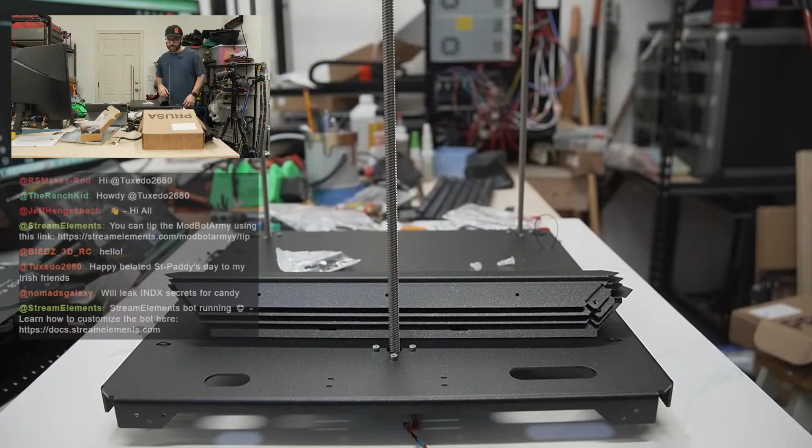So last week we finalized the teardown of the Mark 4S and started on the bottom frame here. We basically got the bottom panel and attached the spacers to the Z lead screws and installed these guys. I think the only thing I've done off stream— if we need to lube the bearings today, I did actually remember to print out the little nozzle piece, I just left it upstairs.

The last 24 hours have been kind of crazy. I've been editing a 32-minute review on the Centauri Carbon 2 that's coming out on Saturday, and I've also been printing a ton of Gridfinity stuff, trying to finally organize my chaotic life. It's actually been quite fun. I do print a lot, but a lot of the printing I do is for videos, so there's a lot of things I want to print that I don't get to because I need something artsy to show off detail. But now, for this, it's functional organization, which is kind of my jam.

So yeah, the one thing I did off stream was install these two printed pieces. They just popped into place. Then I used the included larger wrench to turn them 90 degrees and basically move the pegs so that they're under the sheet metal and can't pop these parts out again. Everything else we've done on stream. So Friday—ooh, that's exciting.

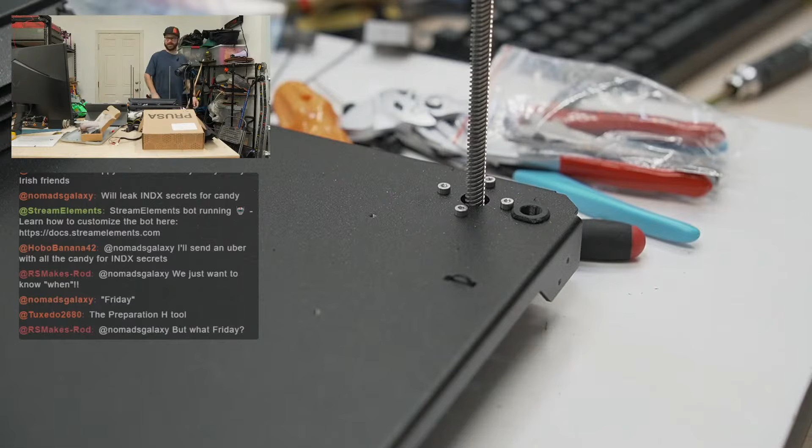The game plan with this guy initially wasn't really the game plan because I wanted to do INDX, but I wasn't sure what it was going to go on. I think that was before I knew I was doing the CORE One conversion. But now that I'm doing this, it makes a lot more sense to use this for INDX whenever kits and stuff are available.

All right, I did do a teeny tiny bit of the Preparation H tool, yeah. Do you use Fusion? A tiny bit. So we'll change to me real quick.

I have jumped through a lot of CAD software. When I first started playing around with 3D printing, it was like 123D Design, which wasn't good, but at the time it was free and enough for me to learn a little bit. Then I used Fusion, and my CAD skills are quite novice—beginner plus, maybe intermediate would be a step up. I can CAD some functional stuff and modify parts, but I don't want to overcredit myself. I played around with Fusion for a couple of years when I had a student license, then got a hobbyist license for a bit. Then once they started changing up their licensing, however many years ago that was, I jumped over to Onshape.

I used Onshape for a little bit, and now for the last 3 years or so, my daily driver is Shapr3D, which is what we pretty much always use on stream to reference CAD. Shapr3D is paid, and it's more expensive than I thought. I think I thought I was paying like $150 a year, and I'm pretty sure we checked on stream a while back and that wasn't the case. I'm actually curious to see if I go into Shapr3D.

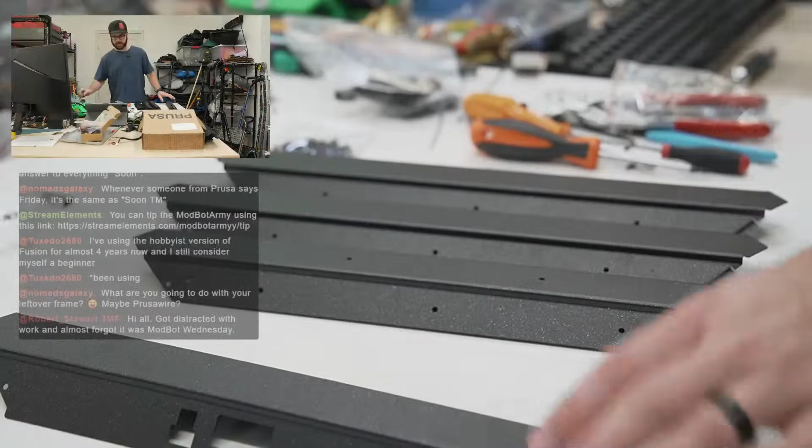As far as parts go, there are 4 parts here. 2 of them are different, 2 of them are the same. We've got one with these cutouts right here, one with these 2 holes, you can't really see those - there you go, 2 holes right here. And then 2 of them that don't have holes at the top, and they're basically, let's see, 2, 4, 6, 8, 10 holes, 2 columns, 5 rows. That's great.

Hey, Robert. I don't think I said hi to Rod. If I didn't, did I say hi to you? I don't know if I did, RS. If not, hi, I apologize. I read your name and then got distracted.

So I've got all the parts. We've got these, so we can move on to assembling these now.

It says be careful when handling sharp metal. Knowing myself, I will cut myself because I always tend to hurt myself. I'm a professional at accidentally... oh, I did. Cool. Thank you. So many times my brain can think faster than I can speak things. Contrary to what you might believe, considering I know I talk very fast, sometimes I'm like, did I say that or just think that I said it?

Okay, so orientation wise, it looks like we want the little cutouts facing us on the bottom. And the side has this sort of lip that comes down a little bit, and that should be facing upwards. So it looks like this is going like this, but as far as how it overlaps, let's see - place the front profile according to the picture, place one of the universal profiles on the left side.

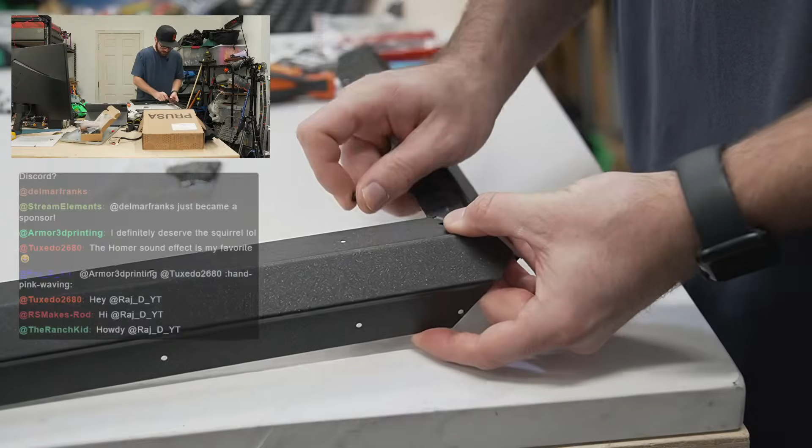But this review video I'm working on, my review videos keep getting longer and longer, and I'm not actually a fan of it because I'm a squirrel, I don't like incredibly long videos, but I also have this issue of thinking information is going to be quite... wait, hold on.

Align the holes, join the parts together.

A lot of the information I cover, I think, is important, and that's why I cover it. So I don't want to just make a video shorter by cutting out information. It's been this weird balance, and because printers are getting so much more involved and complicated, and a lot of them are having multicolor add-ons, I could do a full video on just the multicolor add-on. So it's like combining 2 videos into one.

Anyways, I've been dedicating my free time to getting this video out, because I cut back on videos to just every other week now, instead of every week for years, then 2 on, 1 off. But with 2 kids and trying to juggle everything with LightBurn, Millmage, and YouTube, I can't.

Especially again, the videos are so long now it's almost like I'm making 2 videos out of one. So I'm working on putting together some topics that will be shorter videos, more like 10 minutes, that are more attainable for me to knock out quickly. But I cannot bring myself to cut information from the videos when I feel like it's going to help somebody.

The Homer sound effect.

I grew up watching The Simpsons all the time, and it was all Fox 11. I think it was like 6 p.m. my time, when it would come on after Malcolm in the Middle.

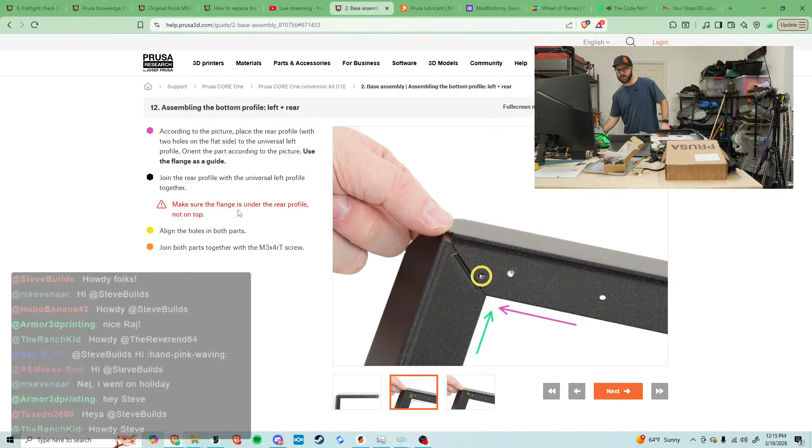Wait, did I screw up? Hold on, let me focus for 1 sec here. Okay, so this looks correct. This says the flange of the front, blue arrow, must be under the universal profile, green arrow. Yes, it is, that looks fine.

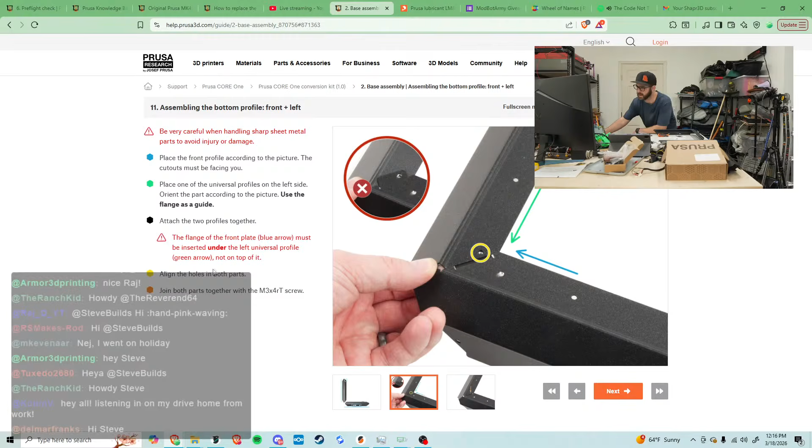But for the next one, it is not going to be like that, it's going to be over it, right? Is what we just read. Let me see, no, it's also under. Make sure the flange is under the rear profile.

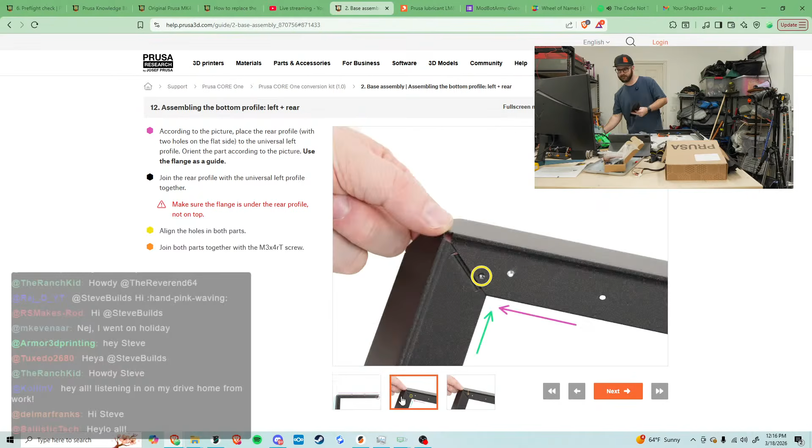Yeah, okay. So it looks like it's just going like this. Make sure the flange, yeah.

Okay, so let me change pictures again here. So for this right here, this is going on top of this one, according to the instructions. I just don't want to screw that up.

Hey Ballistic, I'm listening on my drive home from work. Hey Colin, thanks for tuning in. Hey, I went on a holiday. Oh dude, even better man, you get to eat some yummy food? I hope so.

All right, I'm trying not to over tighten these as well. I mean, it is metal, but it is sheet metal, and I've been known to, in Steve terminology, do at least one too many ugga-duggas. So I'm trying not to do that. It's plenty tight, plenty tight.

Oh, and completely unrelated to 3D printing news: last week I said that I got a fish tank stand that had just got delivered, and I was really excited to get this big tank set up. Well, I was like 60% done building the fish tank stand, and one of the self-tapping wood screws blew out a wall in the particle board.

Instead of using that, let me show you guys this real quick. I did a lot of research, and pretty much all the stands you can buy that aren't insanely expensive use particle board. Particle board is okay, but it's not very strong compared to solid wood, and if you get water on it, it just sort of falls apart. Granted, most of it is sealed, but not fully in all areas. I remember when I had a tank like 12 years ago, during a water change, water would sometimes get around it.

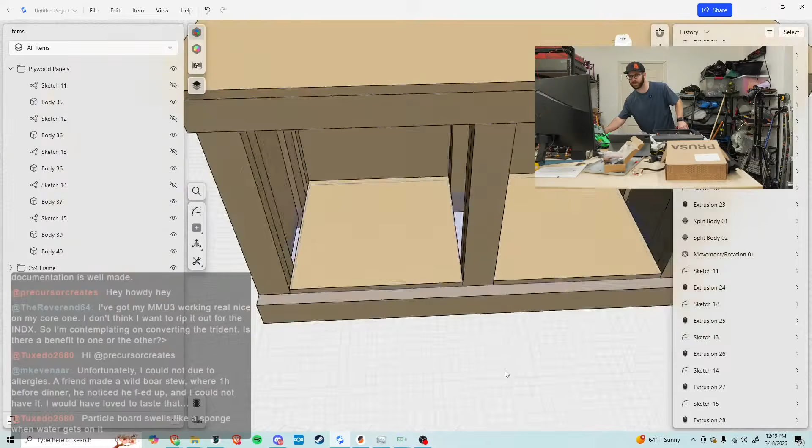This isn't my design. I found the drawings for it, and since we were talking about Shapr3D, I took it and made a 3D model out of it. The only things that'll be different - there's the back panel, and there will be 2 hinge doors here. Also, I didn't own a jigsaw before, so I put squares here, but now that I picked one up, this will be a single piece of ply that I'll notch out and puzzle piece in.

The last thing I'm going to play around with is getting some crown molding and seeing what it looks like cut around the top. It's going in the living room, which is why I want it to look kind of fancy or nice. So building it will be one part, but then sanding it down and either painting or staining the whole thing will be the second part.

Yeah, particle board and water does not mix. I watched some videos and saw some Reddit stuff, but I'm pretty happy with how this looks. I think it'll be quite nice.

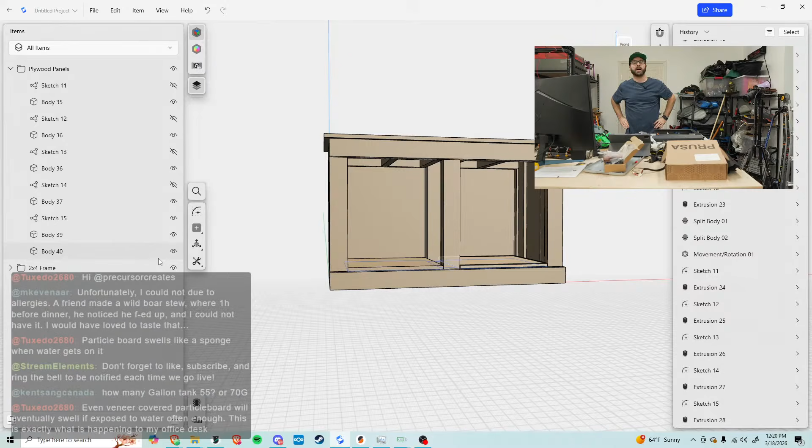How many gallons? It was going to be a 55 gallon, and then we went to a fish tank store, and the lady there convinced me to get a 75 gallon instead. It's basically the same - same exact length, 4 feet or 48 inches. But the 55 gallon's depth is like 12 or 13 inches, and the 75 gallon is the same height but the depth increases to like 16 or 17 inches, so it'll roughly take the same footprint. The furniture will be a bit bigger since I'm building it now instead of using the one I bought. But yeah, it'll be 75 gallon.

Even veneer covered particle board will eventually swell if exposed to water long enough - that's exactly what's happening to my office desk. The more research I did, I know people use these stands, there's tons of people buying them online, but I have kids, I'm clumsy, and it just feels like a potential accident waiting to happen in my opinion.

So yeah, thank you for listening to my unrelated talk.

75 is a good tank size, especially since I'm doing freshwater. I really want to do something similar to the tank I had when I was younger - freshwater, sand bottom, live plants, driftwood, and a community tank. That's what I'm going for. I do like saltwater too, I love all aquariums and fish, but I want to do freshwater in this case.

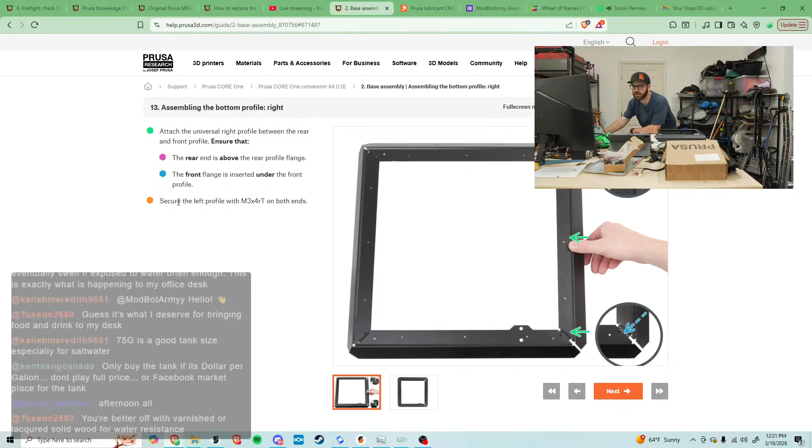Okay, attach the universal right profile. The rear end is above the flange, okay? The front flange is inserted under the front. So, above and underneath, got it. Above on the top, underneath on the bottom. That's what it says, and that's what we're doing. Okay, let's just get these screws.

So I don't know, one of my buddies recommended, I think it was a Fluval. It's pretty expensive, but the filter is oftentimes the most expensive part of it. Aside from that, lighting won't be cheap either, because I want really good lights that will be able to give the light that's needed for the live plants I'll be growing. So I think I'll look at the Fluval one my buddy sent.

When I had a tank 10, 15 years ago, I had a sump underneath that was all my filtration. This does have space for a tank underneath, but I don't want a tank that low to the ground with my 2 young boys. I just don't want a sump that low to the ground. So yeah, it'll be a canister filter. I just don't have it yet.

All right, this is officially on. Nice, go Fluval FX6. Wonder if that's what my buddy sent me. What's the price on it? The one my buddy sent me, I think, was roughly 200 and some change. It's definitely expensive, but it's kind of the heart of the tank. You've got to have good filtration.

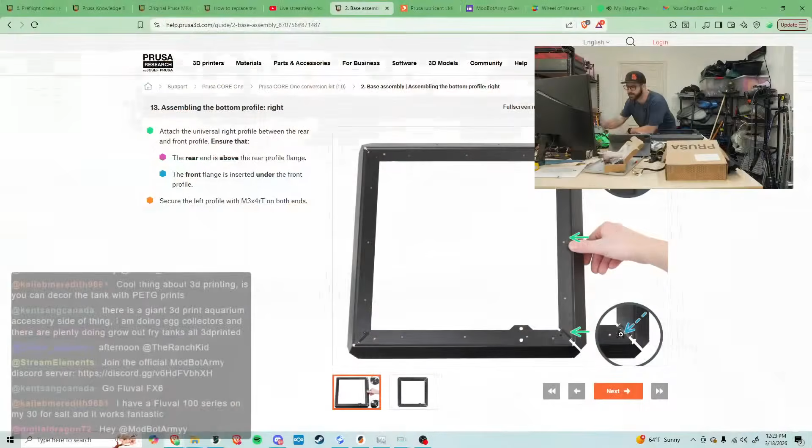Hey Luke, all right so we got the last piece of this panel on. Attached to universal, we did that. Secure, yeah okay, same page. Insert the spacer pin in the hole in the front profile extrusion. Push firmly. Use the same procedure for the second.

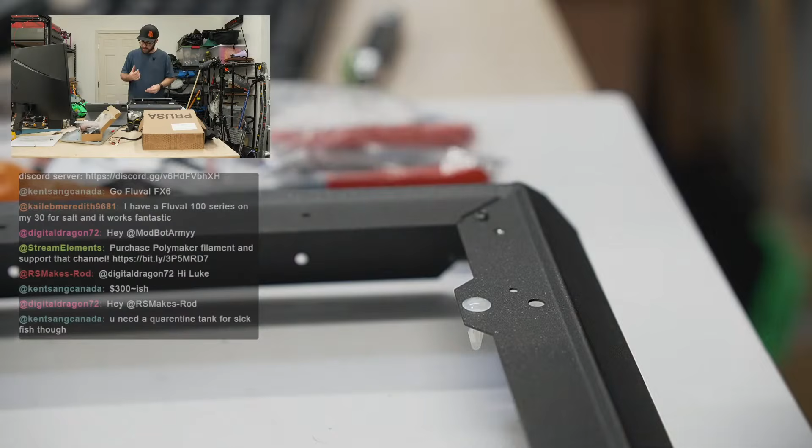Alright, so there's 2 large openings here, and I guess these guys are just going directly in. It goes in really easy until the end, but it's a very satisfying snap, louder than I thought because of the sheet metal kind of vibrating. Yeah, there we go. All right, those are never coming out.

You need a quarantine tank for sick fish though. Yeah, I don't know what I'm gonna do with all that. I was reading and a lot of people were talking about having quarantine tanks and stuff. Maybe I can set up something really small, like a 10-gallon down below, but I probably wouldn't have space for that. I would definitely have to child lock it. We'll cross that bridge when we get there, I guess.

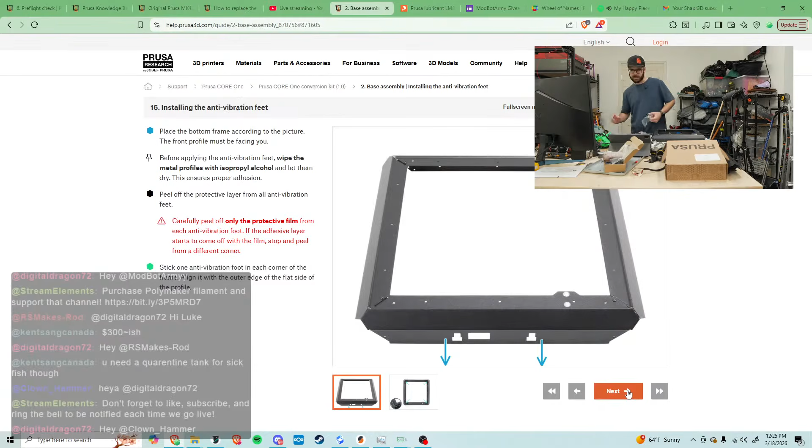Let's see, place the bottom frame according to the picture. Yep, I have it in this orientation. The front profile must be facing you. Before applying the anti-vibration feet, wipe the metal profiles with isopropyl alcohol and let them dry. Peel off the layer, carefully peel off, stick one in each corner of the frame.

Got it, so basically, okay, yeah, so we can do that. I mean, to be fair, I guess there could be oils and stuff or dust from the factory, so we will just do a quick little wipe down.

Water is 10 pounds per gallon. Yeah. The stand that I'm building, the person that put out the plans does some sort of conservation effort with fish, and this stand design was rated for... I don't want to say I'm exaggerating when I say 30,000 pounds. That sounds ridiculous, but I want to say it was at least 10,000 pounds.

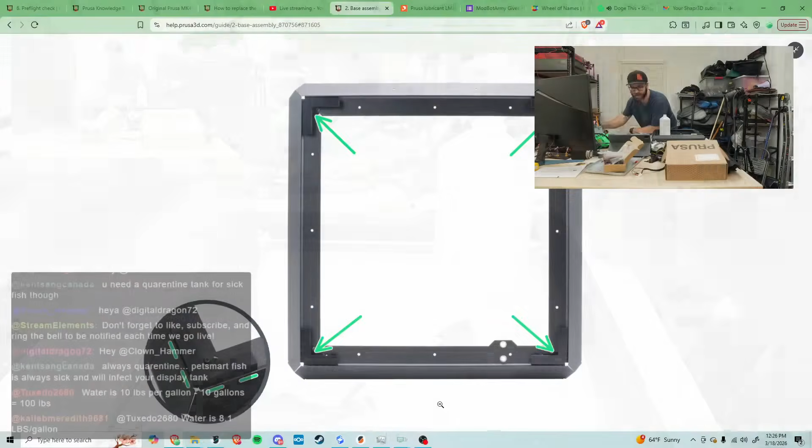It is like, I mean just to show, god, one last, okay I promise after this no more fish talk. But if you look at this, you basically got, these are 2x4s. So 2x4 here, 2x4 here, so 2, 4, 6, 8, it's 10 2x4 verticals sandwiched between them. There's more 2x4s, but the other ones are just basically alignment 2x4s that you bolt this to, so that way it lands there. So it's 10 vertical 2x4s. It should be really strong.

And then if you look underneath it, I guess last thing, there's a lot of cross bracing as well, way more than it needs for the size this is. My biggest concern honestly is once I build this thing and paint it, how am I gonna move it? It's gonna weigh a couple hundred pounds.

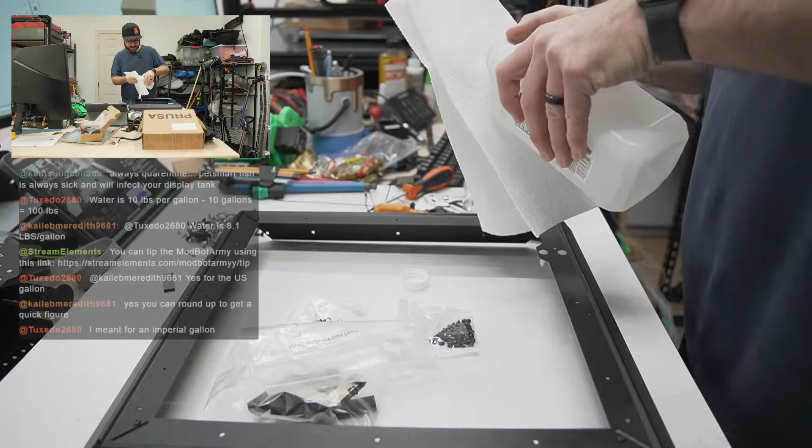Okay, let us do this. So I'm just gonna rub isopropyl in this inner area where the adhesive is actually going to go. So we'll do one pass where I just kind of saturate it. There's a little bit of stuff that came off of it.

You're gonna break your floor joist. I mean, obviously I'm not going there, I'm only doing a 75 gallon. I read somewhere that a 55 gallon fully filled with gravel and stuff is around 1,000 pounds, so I've got to assume it's probably gonna be 1,300-ish pounds. I'm not going anywhere near what its max capacity should be.

I just figure it's one of those things where I'd rather build it with more. There's a little bit of IPA, it's not dry, let me dab it.

Yeah, so I was close. You said 1,200, that's my guesstimate was 1,300.

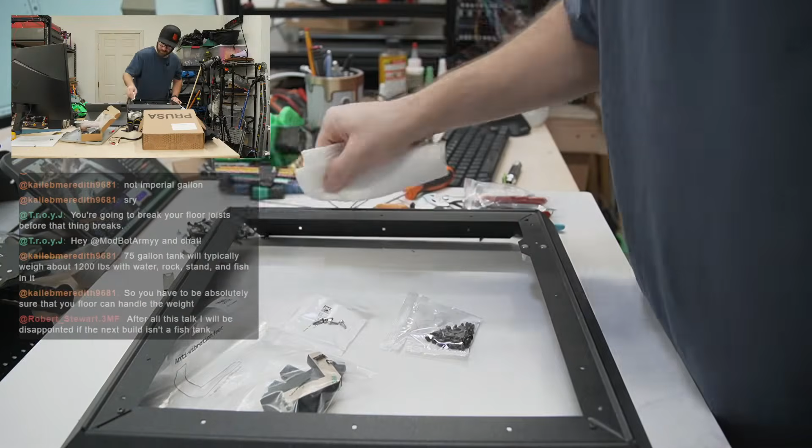Okay, after all this talk, I'll be disappointed with the next build. I definitely don't want to do any woodworking on stream. I have very little experience because we always rented, I never had a garage really, so I haven't done a lot of woodworking. I definitely need all focus to not cut things crooked or injure myself, so I'll have to show you guys pictures or a video I take, kind of showing before versus after instead of showing you the build.

Okay, so we are peeling these and sticking them. I can't imagine, so it's got to be on a flat surface, so it must be right up to where this lip is, not on the lip, because that wouldn't make any sense.

I do know that I feel like I saw Joel and a couple other people saying that there's a mod for replacing the feet that makes better feet. So I might look into that eventually, but for now, for this build, we'll stick with these feet.

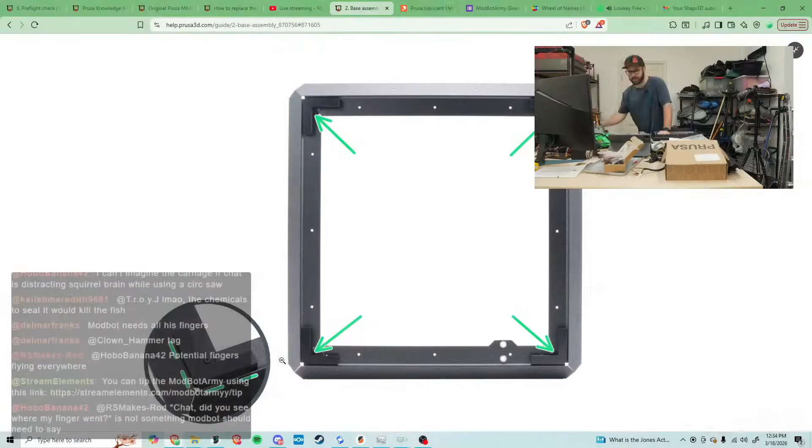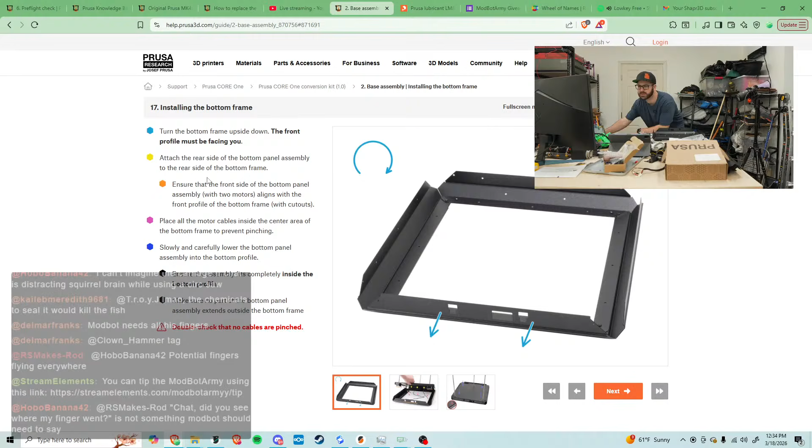Okay, so turn the bottom, yeah, we did that. The front profile facing towards you, so we want the cutouts facing towards me, like so. Ensure the front side of the bottom panel assembly with the two motors. Oh wait, attach the rear side of the bottom panel assembly to the rear side of the bottom frame. Sure, the frame.

Okay, so this is dropping in here. Ensure that the front side of the bottom panel with two motors aligns with the profile of the bottom frame with cutouts. Okay, let me grab that piece I just, oops, crap, one second.

I'm trying to keep these screws in their labeled bags as much as I can, so I'm not running around trying to measure stuff more than necessary. Okay, let's move these right here, I'm gonna grab the bottom frame.

Okay, so does this go over it? Like... oops, that did not go well. Let me look at what the next page looks like.

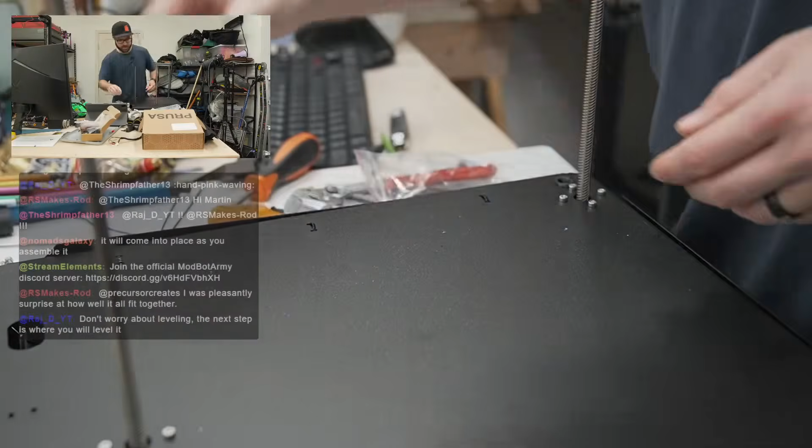Yeah, once I saw the photo, I felt good about it. It's just going off how it looked in front of me that made me feel like I was doing something wrong or something was off. But once I looked at the photo, I was like, nope, we're doing exactly like we're supposed to.

Okay, so first screw is in. It's probably plenty tight. So we got that installed. Align the holes in the base of the profile. Okay, so this is just the back one now. This is gonna level out this side already.

If I can get it in the hole... there we go. Okay, and it's level, at least on that side. Right, next, probably the same thing on the other side, I would imagine.

Move to the rear assembly. Okay, so I guess not the case. Align the holes in the bottom. Align the holes in the assembly. Okay, so it's just having us go around it. So it wants us to go move to the rear, move to the left, move to the front. Okay, got it. I can spin this now, technically.

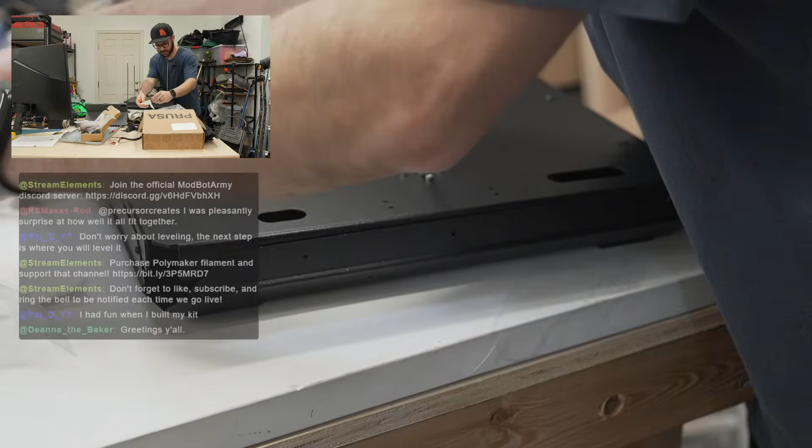Okay, we're gonna need 6 more of these screws. 1, 2, 3, 4, 5, and 6. All right, so I'm gonna build my kit.

Yeah, I mean, I will say that from my experience building a few Prusa printers over the years, the organization of it all is really nice, and the instructions, generally speaking, are really solid as well. Usually if there's anything that's a little unclear, if you look at the user-provided comments or feedback, it tends to answer them.

Okay. Is Deanna here? I didn't even see Deanna. Hi, Deanna. Hi, I think, yeah, Caleb was talking earlier. Okay.

Okay, just gonna keep spinning it because that's the order it wants us to install these in.

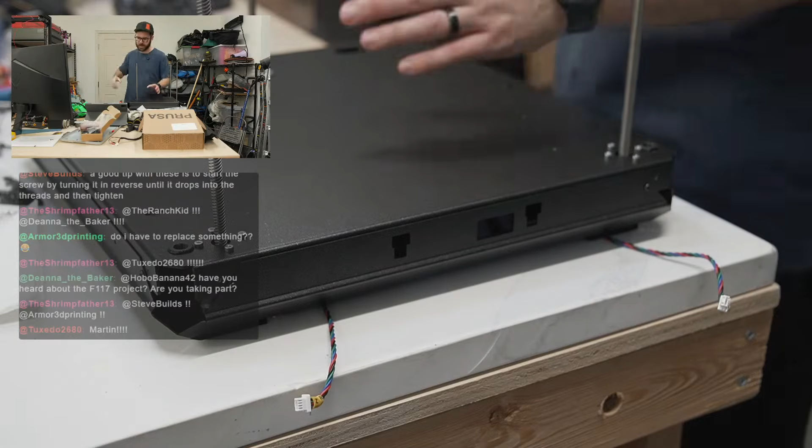Hey, Shrimp Father. You're stronger than you think. Dude.

Let's see. Okay, those are all in. Cool.

Oh dude, I'm not gonna stack the gummy bears because we haven't had mice in some months, so I'm trying to keep it that way. But I'm definitely gonna eat a couple gummy bears right now. Well, let's do 2. It says 5, but we'll kind of space it out a little bit.

Oh yeah. Wow. That's delicious. Okay, woohoo!

Congratulations, you've assembled the base. Set that aside. Okay, what's next?

Some electronics. Wait, so this, yeah, cool. All right, let me put this guy back over here so we got some more room to work with. Put the Mark 4S frame back on top.

Alrighty. Okay, for the following, please prepare one buddy box, one CORE One buddy box, found in the metal parts 3 of 3 package. Metal parts 3 of 3. Here it is.

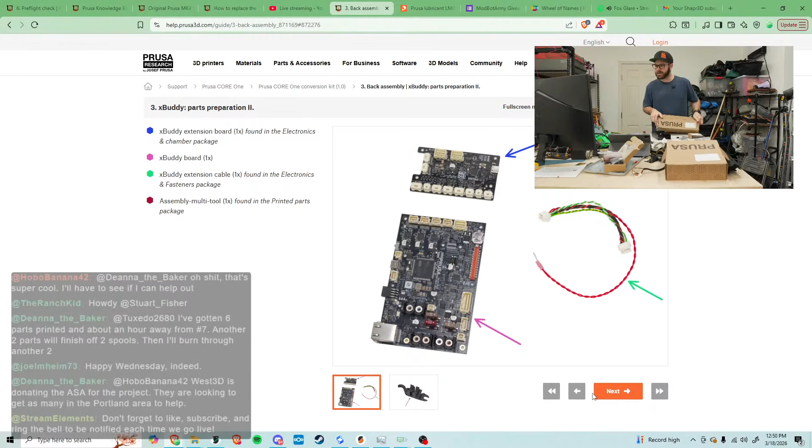And then we need xBuddy extension cable, electronics and fasteners. Nope. Okay, we're making progress, just a lot of pieces here. Okay, so the cable is called the xBuddy extension cable, and that is, let's see, cable 1 of 3 box. No, xBuddy extension cable. Got it.

It looks like this piece right here. Okay, all right, let's find the printed part, then I'll run up and grab the board, and then we should be assembling.

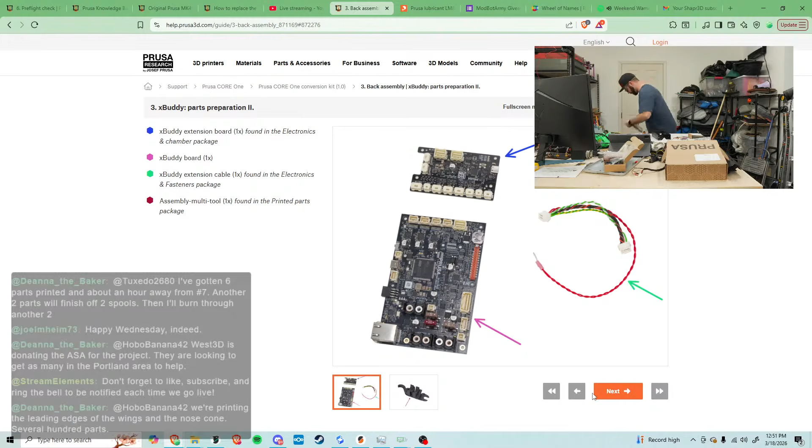Printed part is gonna be in here. And it's called what? It is the assembly multi-tool, which looks like this. Assembly multi-tool. I found it.

All right, I am going to show you guys my messy setup, I guess. I'll zoom in a little bit. I'm gonna take 2 gummy bears, throw them in my mouth, and bring one to Jackson, he'll be really happy. Then I'm gonna mute my mic. I'll be right back, give me just a minute.

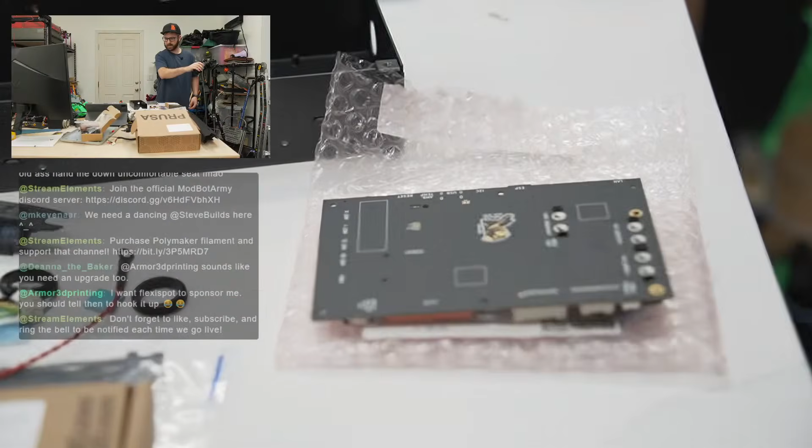Okay. So we are peeling off not the blue side, but the white side.

Working. You said tweaking robot, but I think you meant twerking, right? I think that's what you meant.

Okay. One down, 2 to go.

Hey, Rocky Mountain, how's it going? Is it Justin that's running this account? Either way, thank you for stopping by. I know you must be probably busy with all the last minute preparations. Nice, how's it going, man? It's like what, 30 days roughly? I was just asking Steve about it. I think he said based off the date when I talked to him that it was like 30 days out.

Taylor has Dancing Baby, Steve has Dancing Max. Maybe Daniel should have Dancing Squirrel. Yeah, I wouldn't be against that either. Dancing Squirrel, it'd be very on brand. Might be easier to find too.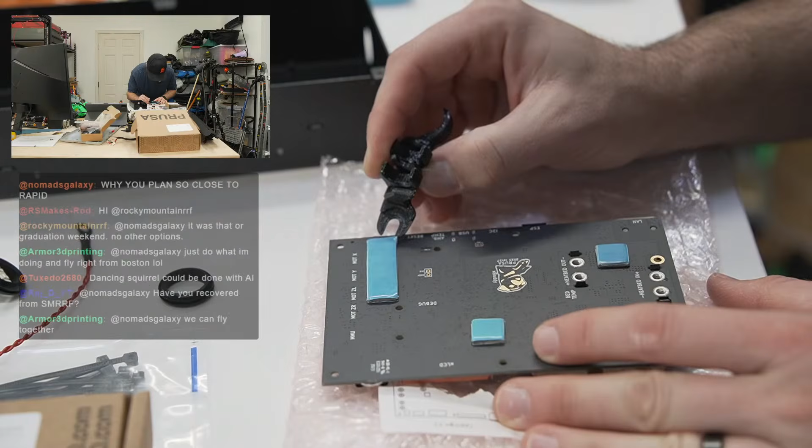Well, that definitely worked to get it going. It's a lot squishier than I expected. Get off my finger.

Okay, only indented that one a little bit. Gotta indent the part every once in a while. Yeah, the multi-tool did a pretty good job.

What's next? I assume we're placing these in. We are, always touch the sides. Insert the xBuddy board in the xBuddy box. Make sure the Ethernet connector is properly inserted before aligning the board's holes. The buddy board finds its position by inserting five end screws. Do not fully tighten, a few turns is enough for now.

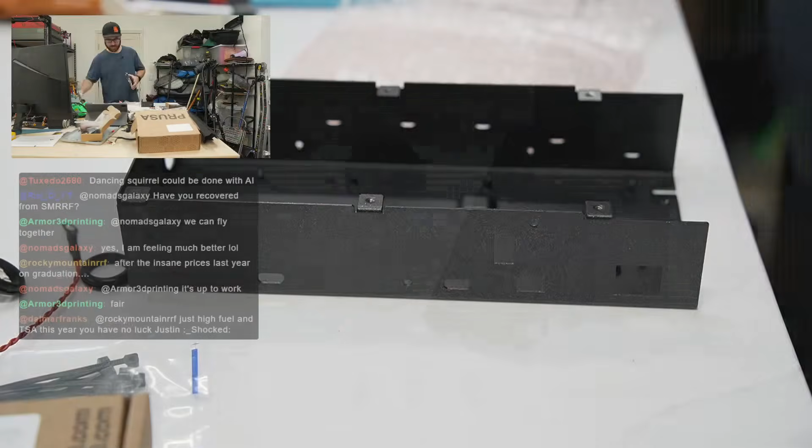So this is, where's our cutouts? Cutouts are here. So let's get this in. One second here, bring you guys up a little bit higher.

Can I bring you higher? Is this as high as you go? There we go, a little bit higher. Bring this a little bit closer. Bring you guys down a little bit. That's not great still. All right, I guess we'll just go with that.

So this is going into here. And our Ethernet port looks like it is seated correctly. And we need to go down a little bit, it looks like, or no? Okay, oh that popped out. Why does this not want to... Does this not want to align perfectly? Okay, it's definitely the Ethernet port that's making things funky.

Okay, that looks pretty good. We're gonna leave that there. And we are going to, I'm gonna zoom out a little bit here. Oops, that's the opposite of that.

Okay, last week there were a few rooms on site at, geez. Okay, so here's all of the locations.

Why'd you wait so long, Armor?

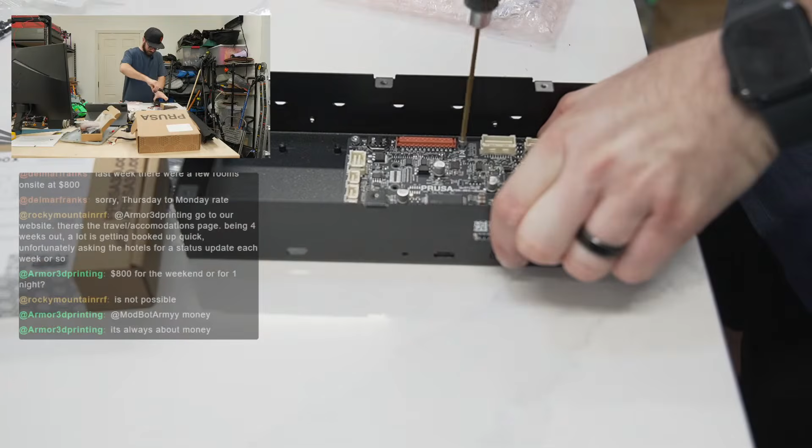That's right, Steve said just do the left turn first. We'll do that just to be safe here.

Money, got it. That is a valid reason to wait.

Okay, so this one gets one.

Okay, all right, so board is in. None of the screws are tight, fully tight. Wait, what? It says, hold on.

Fully tighten all 5 screws, but there's 6 screws. I'm confused. There's 1, 2, 3, 4, 5, 6. Wait. That's weird, that feels like a conflict of... Am I reading like... wait.

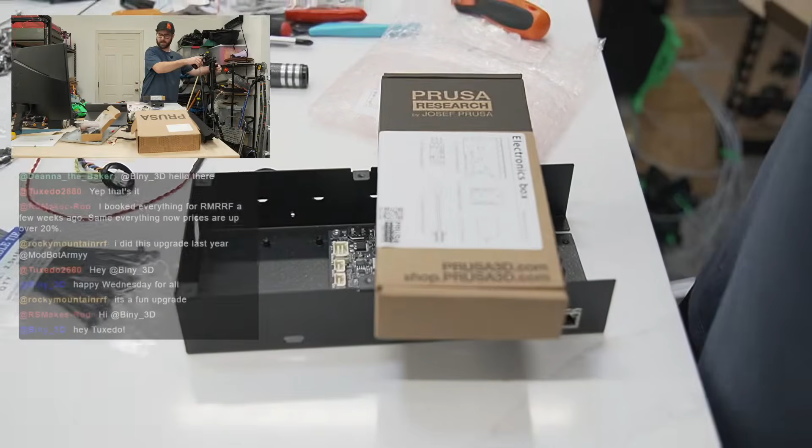Oops, I don't want to break my lens. I'm grabbing it by the lens, but there we go.

I'm sure I will. As long as, like, before Index goes on it, I'm just gonna use it for printing out all the things that I need, just throwing parts at it for projects. And then once I end up doing the Index conversion, I will probably use it more as a specialty machine than just a generic machine. I don't know, it'd be fun to do some experimenting with it.

Because the Snapmaker U1 is a tool changer, but right now I don't have a top lid on it, even with a top lid. Based on my testing of the Centauri Carbon 2, that top lid really is not ideal for ABS or ASA printing. It just takes a really long time for the chamber to reach temp compared to a more compact machine. So I might install a panda breath inside the Snapmaker U1 if I enclose it, just to help heat up the chamber. But yeah, I think the Core 1 being more compact, the top hat area of it will allow me to experiment with more materials than something like the U1.

Okay, so board is out. It looks like it aligns like this. The USB-C cable just goes into the hole. And I think we're using the same screws, right? Yeah, 1, 2, 3, and 4.

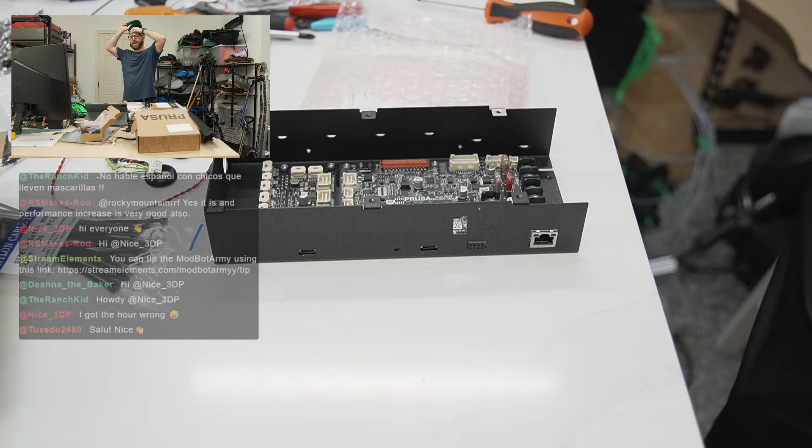I got the hour wrong. No worries, man, I slept pretty bad last night. The night before I slept incredible, so that's why I'm still doing okay, kind of riding that good sleep high. But last night I was editing till about 12:30 in the morning, and then I was going to go downstairs, but it's been warmer and I'm upstairs in the studio with 3 printers running and a bunch of studio lights on, so it was like 80 degrees when I was done. I had to go downstairs and just cool down. I can't get into bed coming out of a room that's 80 degrees, I don't sleep well warm like that. And then I finally got into bed, but my mind was still in race mode, thinking about work and projects and things I gotta get done. Then Jackson came in at 7 a.m. and I couldn't go back to sleep after that. So I probably got maybe 5 hours if I'm lucky, which used to be fine, used to be plenty of sleep for me, but not anymore.

Sleep is a lot more valuable to me than it used to be. I got nightmares all night. Ah dude, sorry to hear that, not a fun night. I don't dream very much. I've been taking medication for like 11 years for panic attacks, and if I do dream, it's a nightmare. It's kind of a side effect of the medication, but I don't dream very much in general. So, but yeah, nightmares suck.

All right, we got 2 boards in. We are... no, we got a lot of boards. Zip ties, probably 6 perforations. Proceed carefully, attach the hook on the assembly.

The process, okay so we're just feeding zip ties through loosely. Got it. Okay, so zip ties.

Dream, I've heard about those.

I need a blade or something. Let's see, I'll just use this, I guess. Man, this is fierce, god, the zip tie bag is fierce.

Dreaming can occur in... okay, got it, in both. I never remember my dreams, but the wife says I spend a lot of time talking in my sleep. My mom says it about my dad too, that he talks a lot in his sleep. She says he sounds like he's fighting someone in his sleep, like he'll swear and stuff.

And I'm like, huh. 1, 2, 3, 4, 5, 6. Is that what it says? 6 of them? Yeah, 1, 2, 3.

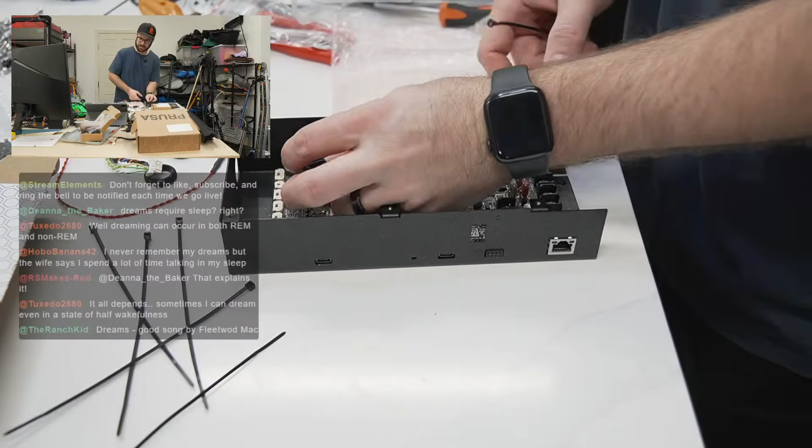4, 5, 6. So on the multi-tool thingamajig, which is this guy, there is a little hook. And so we're going to use the hook because we don't have enough space to really feed our... I'll turn this so you can see a little bit. We don't have enough space to really get our finger underneath these slots and easily guide this. So we're just going to place it underneath, push this in. It curves it for us beautifully. And then we will just kind of leave it like that, dangling on the board.

Definitely handy. I would have probably used something like a flathead otherwise, but having the curve instead of just a flathead makes it easier. Definitely makes it easier.

It all depends. Sometimes I can dream even in a state of half wakefulness. I used to dream a lot when I was younger. I had a pretty wild imagination, and I read a lot.

I read a lot of books before I turned into a squirrel as an adult. I can't hyper fixate on books as easily as I used to. But when I was a kid, I could read for hours and hours, a lot of fantasy stuff. I was big into Harry Potter when I was a kid. I still like them, but I read the books back then.

That stuff definitely carried over into my dreams. I had some really cool dreams. I remember one time when I was really young and into all the Harry Potter stuff, I had a dream that I was a wizard with a wand and powers. That was probably the most disappointed I'd ever been when I woke up and realized it wasn't real. There's not a lot of dreams I remember, but that's one. It was certainly exciting, and then reality was quite disappointing.

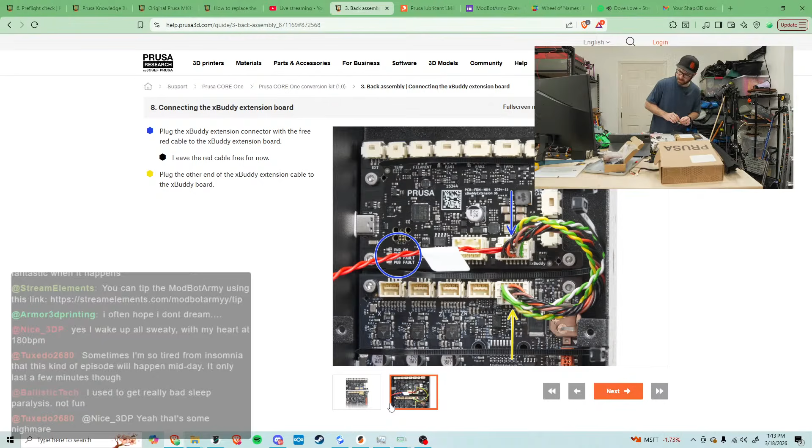Plug the xBuddy extension connector with the free red cable. Let's grab our cable. Plug the X Buddy extension connector with the free red cable to the xBuddy extension board, leaving the red cable free for now. I just need to see a visual of this. Okay, got it. The free end is going into the Buddy one up top, the right plug, so this is going in right here on the right side, and the bottom one is going in right beneath it, like that. I don't know if it matters about the cables, but I kind of want to push them to the side a little bit. Probably fine.

Grommets: insert grommets into both circles. Gently compress the grommet and fit it into the metal sheet, ensuring the groove locks in place. Where are our grommet holes? Here we go.

Okay, these are really nice. I mean, I get that it's just a grommet, but it is really nice.

Once I used to get really bad sleep paralysis, not fun. Is that when you wake up and you just can't move? I remember, because I think bad dreams are a lot more obviously traumatizing than a good dream.

That's a lot of what I remember. I do remember one time when I was a kid, I used to get scared at night for some reason, I think because I had such a vivid imagination. I remember one time I had run into my brother's room and was laying in his bed, and he had left or gone to my room. I heard, and I was already freaked out because I thought I had seen something, and I remember hearing this roar sound, like a roar, silly as it sounds, but it was this terrifying sound.

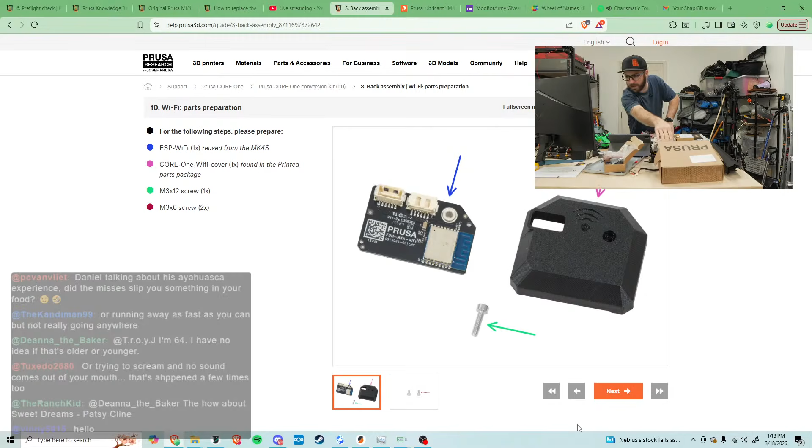Okay, we need CORE One Wi-Fi cover, found in printed parts. Oh, that's a care package. Just printed parts, alright. Core 1 Wi-Fi cover.

What is this, back assembly? I don't think that's it. Core XY assembly. Where is this? Why am I not seeing this part? Found in printed parts bag: Core 1 Wi-Fi cover, filament sensor puck universal mount, Z motor, Z rod, bed cable, bed assembly, multi-tool, love board mount, fan shroud, printed cover, hot end cable clip, main cable clip, front case. It's gotta be in here. Nope, not in there.

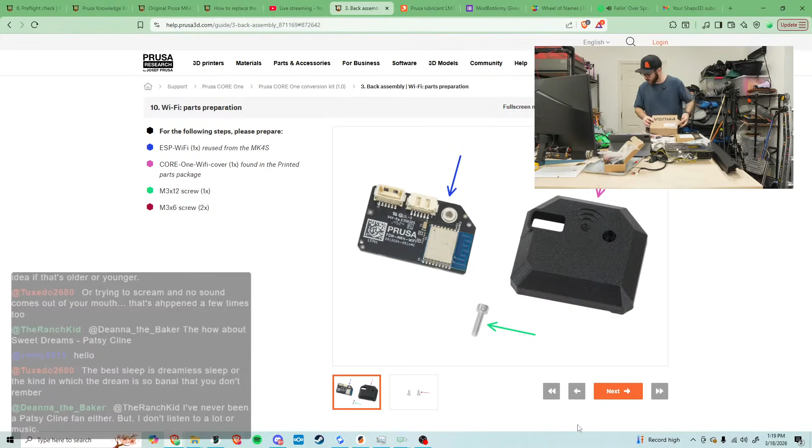Bed on there, Wi-Fi cover, boom. I'm gonna keep this bag of printed parts out because it looks like it's all for this. So this is the back assembly, Core 1, and it looks like it's pretty much all stuff for power supply or electronics. So let's see, here's our printed parts. Cool. And then we need an M3x12, which we have not used so far. M3x12s are in this bag.

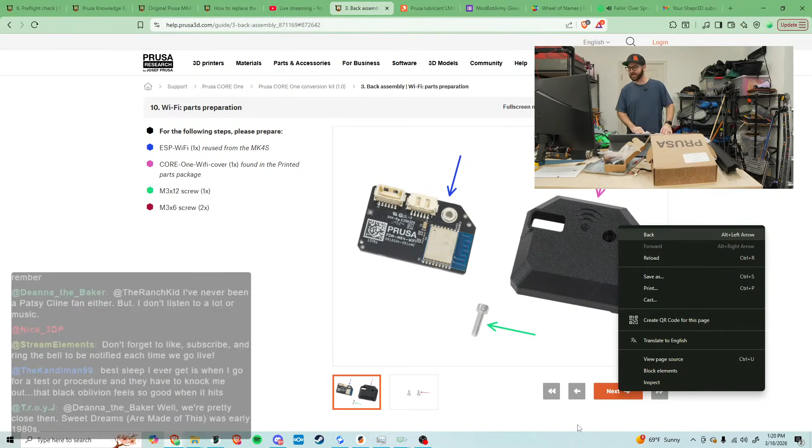Best sleep I ever get is when I go for a test or procedure and they have to knock me out. The black oblivion feels so good when it hits. Usually for me, the best sleep I'll get is after some serious exercise or working out, but usually I don't work out that hard to where I feel that exhausted. Usually it's some sort of project I'm doing, whether it's yard work, weeding, or moving rock - gosh, at this house we've moved so much rock, and I'm gonna have to get probably a couple more yards of pea gravel dropped off that I'm gonna have to move by hand or with a wagon. I still have to scoop it all. Man, that's like sweating and moving. I sleep really good when I do that, but that's not something I do very often, so it's quite rare actually.

Okay. Use a dumper? What is that?

Okay, so the two smaller screws, insert the two in the xBuddy box, do not tighten them completely, leave at least 4 millimeters. Okay, two smaller screws are going on this side. Oops, there we go. I assume a dumper is like a tool of sorts. Is it a push tool? Is it a ride tool?

Home Depot rental time. Yeah, maybe I will this time. The big issue is it has to be something pretty small if I'm going around this way, but the area where the rocks are going is pretty slanted. I don't know if I'd go as far as saying it's vertical, but there's a real good slope. So that would be my concern, is how this thing called the dumper handles a bit of slope.

I think I got a good solid 2 hours. That is horrible. That just hearing that makes me feel tired. Don't you try? I feel like you said you like kind of go with not a lot of sleep, but then you sort of hit a stage where you hibernate for a long sleep. Is that correct, or am I remembering incorrectly?

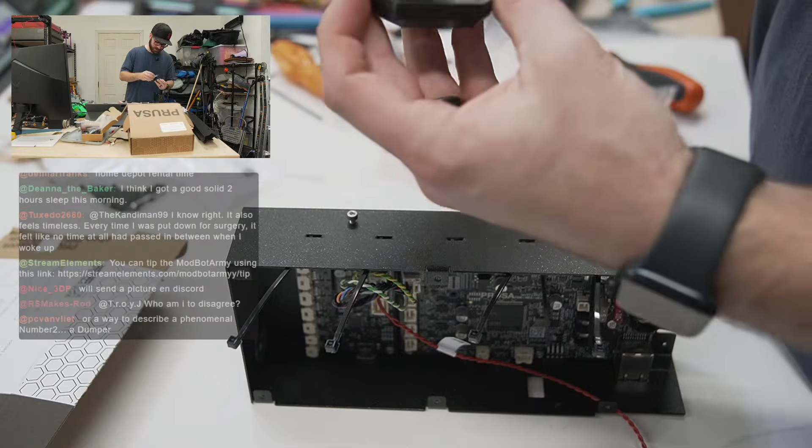Okay, so now this guy is going like this. No, that's not right. What am I doing? Yes, that is right. Okay, so this is in. We've got our plug sticking out, or not sticking out, but at least not blocked. And then we are plugging this in on this side, like so. Make sure I don't screw this up. Yeah, that looks fine. Okay. And then I assume that our M3x12 is gonna secure this in place, probably. Sure looks like it. Okay.

Little sleep, yes. Hibernate, not me. Unless you consider 6 hours. No, that is not hibernating.

We'll send a picture on Discord. Wait, of what? Use it. Oh, the dumper. Got it. Yep, sounds great.

Nice one, PC. All right, that's way in there. We're good. Put the assembly aside for a while. Nice.

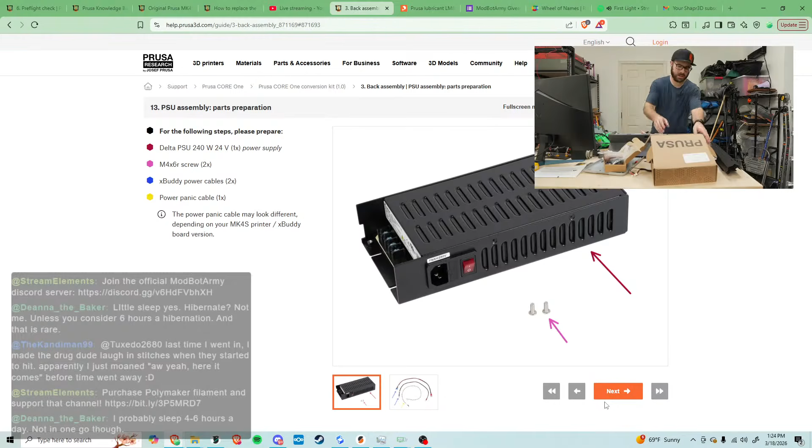Delta power supply. Okay, so let's put this with the rest of the assemblies we're working on. Okay, so next up we need the power supply, which should be right here. Sure is. Okay.

M4x6R. I think that's these guys, right? That we were using earlier. M4. No, definitely not. M4x6R. So it's not, we have not used that. M3, M4x6R. M3, M4x6R. And then we need xBuddy power cables.

Did we keep that? I don't recall. We probably did. Looks like it's these guys. Let's see. Yeah, so there's two. Let's see, one of them has ring connectors. Yep, and the other... no, they both have ring connectors. Right? Yeah, okay, they both have ring connectors. Ooh, I gotta find the screws for that though. That'll be interesting. And then the other little cable. Nope, that's this guy. Okay. Nice.

Insert two. Do not tighten completely, leave at least 4 millimeters. Okay, so same ordeal.

Hey, Steve. I slept for 8 hours once, maybe 23. Wait, what is the reason that you don't sleep more than that, Deanna? I know that you work like super long hours, but is it just work related, or you just don't get tired, or you're like... I'm trying to understand.

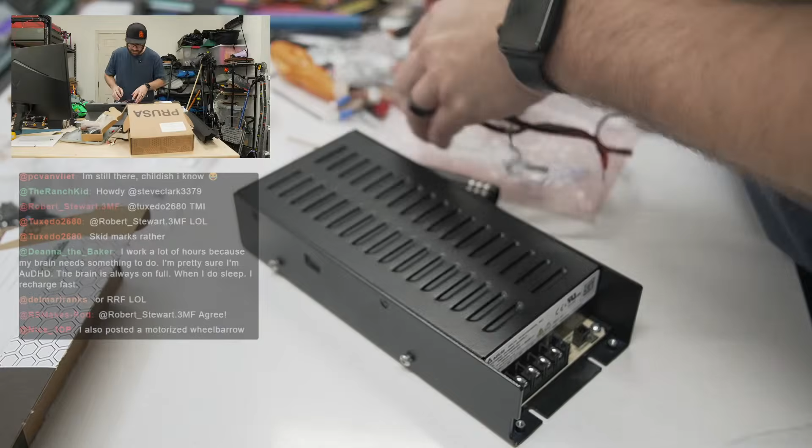So okay, so the thing we need to figure out is I lost the screws for the power supply. I didn't lose them, they're just over here. So I think I've already found them all. Okay, so there's 4 screws, so I loosen all 4 screws.

Hold on, let me read this, there's a lot of text here. In the following steps, we will connect the power cables one by one. The terminal screws are installed on the PSU already. Loosen them, but don't remove them completely, so they don't get mixed up with other types of screws used on the buddy board side of the cable.

Each of the 2 power cables has 2 leads. Red is positive, black is negative. Note that the power cables have different connectors on each end. For now, prepare the U-shaped connectors.

Note the polarity on the red cables. Okay, so we're using the... interesting. Oh no, that is how it was, I think. The thing I don't know though is distance-wise, they're not the same size. Actually, I'm wrong, they're the exact same size, it doesn't matter.

I work a lot of hours because my brain needs something to do. I'm pretty sure I'm AuDHD. The brain is always on full when I do sleep. I recharge fast. Got it, okay.

Because the days are so full for me now, when I do get a lot of sleep, I feel okay. But I remember for a really long time, especially in my 20s, if I felt pretty good to go on 4 hours of sleep, and then if I got more than 4 hours, I would have a lot more panic attacks and anxiety, which might still be the way if I wasn't taking stuff for it. Got it, your reason makes sense, I just wasn't sure what your reason was, I couldn't remember.

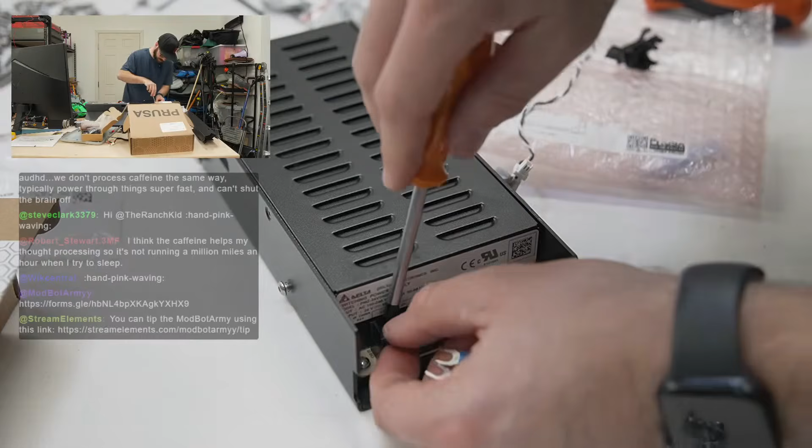Oh, come on, buddy. Okay, that one is going in. I don't know why I took these all the way out if they weren't needed to come all the way out. Doesn't seem like something I would normally do.

Who here has built the 100? Man, that thing is a sleeper. I have not, I don't really know anybody that's built it. I feel like I remember one or two people talking about building it at one point, but not going through with it. It's the fully printed frame, right? Wasn't the Rook based off of it, like inspired by it? Or am I mistaken?

Okay, so we got red on this side, like so. Okay, then we've got ground, negative.

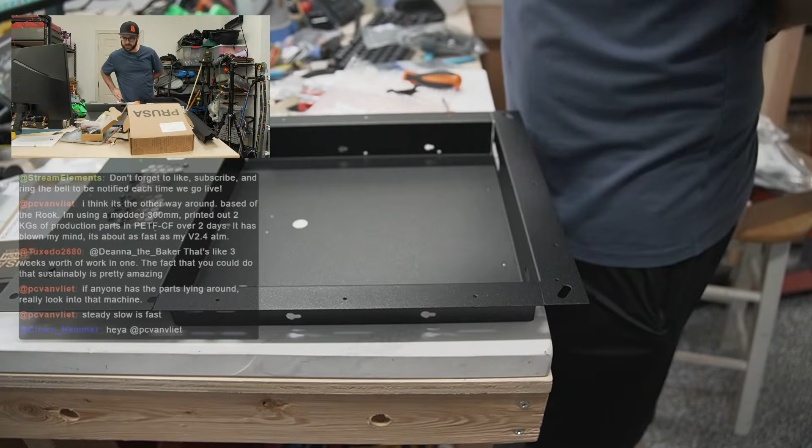I have to work on frequency drives a lot on industrial machines, in tight, blind places, and ring terminals can get frustrating. Got it, got it, because it's hard, you have to take the full screw out to access it.

Yeah, I guess that's why they're used, but I feel like as long as a fork or spade... is there a difference between the fork and the spade? I feel like they're interchangeable. Fork versus spade terminal. Spade and fork terminals are often used interchangeably.

Cool, alright. I think it's the other way around, based off the rook. Oh, it's based off the rook.

I'm using the modded 300mm, printed out 2 kilograms of production parts in PETF-CF over 2 days. It has blown my mind. It's about as fast as my V2.4 at the moment. The 100 is what you built, or the rook?

In my 30s, I was often in a situation where I had to do 60, 80-hour weeks for a month to 6 weeks, but that's all I could take before taking a serious break.

Yeah, the little drill press built from the Mark IV frame on printables looks pretty cool. Is there a drill press built for the Mark IV frame? Maybe I'll use that then, if I don't end up doing the Prusa wire.

I was exhausted after a month. Yeah, I could imagine, for a lot of people at least it's not good for your health. I've definitely hit the stage of exhaustion many times where I'm like, alright, I gotta chill for a bit here. This is obviously too much.

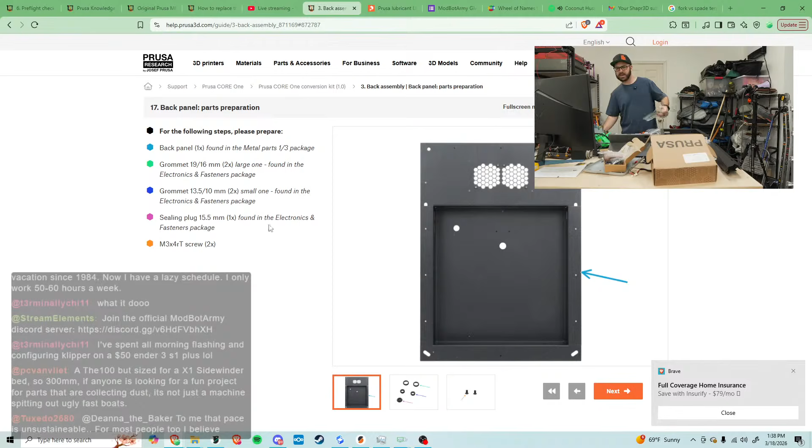Need a sealing plug? That's probably in the same bag I just closed up again. Yep, sure is. Okay, we got a sealing plug, and then we need M3x4 RTs, 2 of them, and I believe we've got tons of those.

Oh, the 100 but size for X1 Sidewinder bed? Oh wow. What do you, the printed parts are just PLA on it, right?

M3x4 RTs, okay cool, we got everything we need for whatever it is we're about to do. Okay, position the back panel, use the 2 holes as reference. Cool, insert the sealing plug into the center hole. Okay, sealing plug into center hole.

Let me bring you guys in. So this is the center hole, sealing plug is right here, and based off the orientation it looks like it needs to go from the back in, like, get in there. There we go, like that. Okay, plug is in.

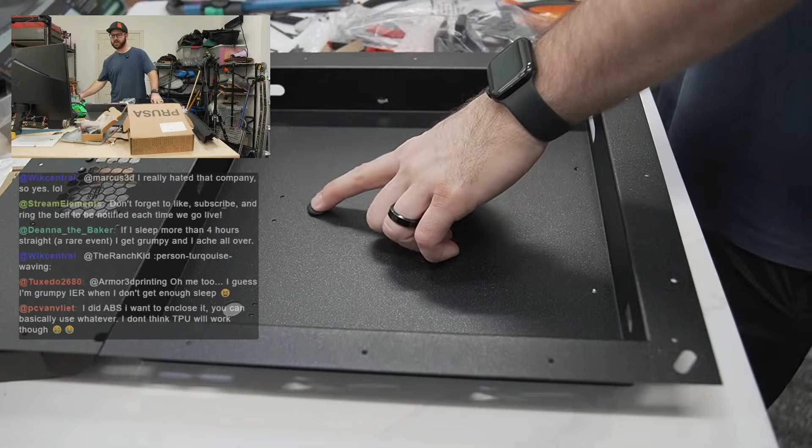Insert 1 small grommet into the left circle hole, which is over here. Oh, that really adds some grip to this. Right there, so small ones are these guys.

Okay, small ones in there. Insert one small grommet into the oval hole. Got one going in up top here, and a small one right here. Nice. And then a large one — I'm just gonna drop you guys down. Actually, let's do the last one on this side first, since you guys are already up here. So one of the large grommets is going in over here, right there.

Let's see if I can get this in. Okay, that's in. And on the other side there's two holes, but we just want a grommet in the topmost hole, which is the one right here. There we go. All right, we've installed — what is that, four grommets and then a plug, I think? Yep, cool.

Grommets pop out of their places easily when feeding wires through. Very easy to put in. Got it. Okay, good to know. I gotta figure out how to make Armor3d Printing a full-time gig.

I skip a lot of meals, so I'm hangry a lot.

What did I miss? We've done some sub-assembly stuff — got the bottom panel on, got the main board assembly put together, attached some stuff to the power supply. Now we're working on the back panel. Looks like we're going to carefully insert the PSU into the rear panel. Let me grab the PSU we just put aside.

Oops, okay, so... oh wrong button, sorry.

Makes me think of — we haven't watched a ton lately, but watched it a little bit — like Emperor's New Groove, the wrong lever. You might not have any idea what I'm talking about.

That's okay. Okay, so carefully insert the PSU into the rear, push the cable bundle through the opening in the bottom. There's no grommet on that one though. Did I mess up, or is there not supposed to be a grommet there? Huh, okay, I guess there's no grommet on that one.

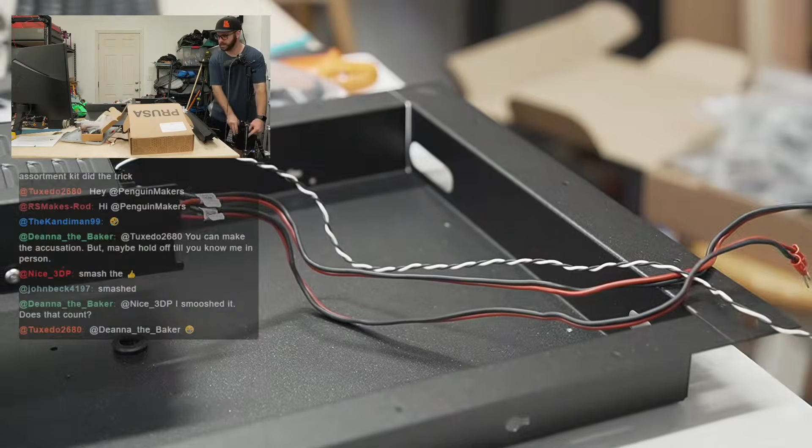My Micron is almost finished. Nice! Your series was a huge help in me being able to get there. That makes me really happy to hear. Congratulations on the build, and thank you for the feedback — I really appreciate it.

Ow, my ears, it's pretty loud. Okay, these are all sliding through here, trying to be careful.

Align the screws on the PSU side hole. Okay, then I assume we're just gonna slide the PSU in, the screws go through the holes. Okay, so...

What did you end up doing as far as your toolhead goes? Did you go with the ant head or something else? And what's your hot end?

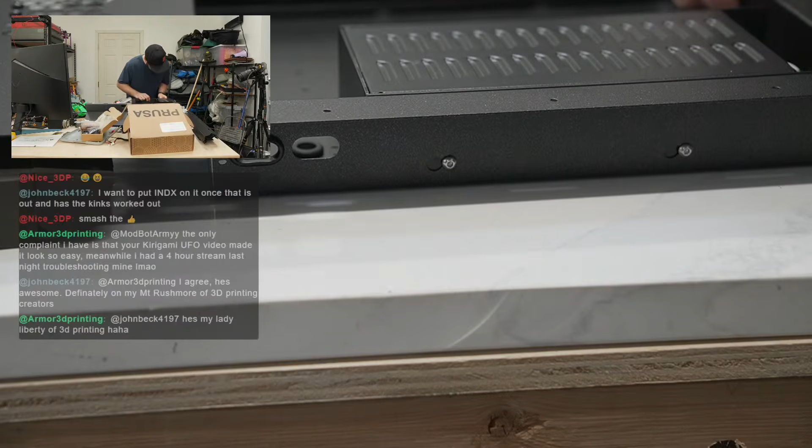I think that was one of the areas where I added another grommet. It feels like it could absolutely use a grommet there, but maybe because it's not going to anything that's moving, I don't know. But yeah, it seems odd to me that we just added a bunch of grommets and then it's like shove the wires through the hole without one.

The only complaint I have is that your Kirigami UFO video made it look so easy — meanwhile I had a 4-hour stream last night troubleshooting. Sorry, a lot of times things take me a long time, I can't tell you how long that took me. That was installed in this house, so it had to have been the last 2 years, but I can't remember. I hope you get it figured out — or did you already get it figured out?

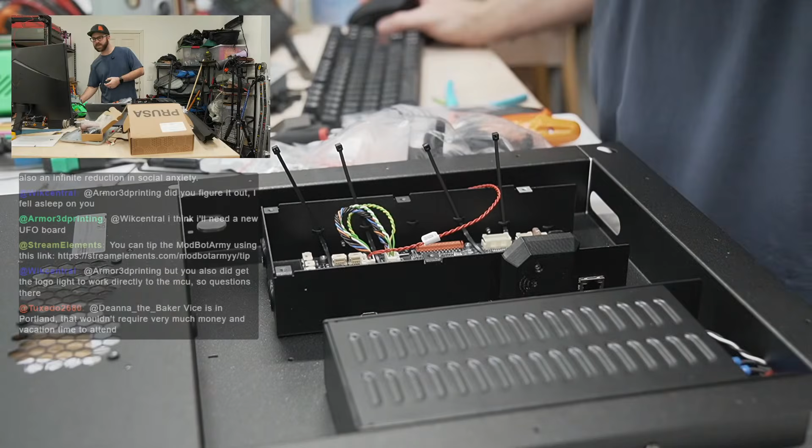Next up we are taking, carefully insert the buddy board. Cool, it's really nice to see this come together. Instead of having 3 different parts, the back, the power supply, and the board, it's all kind of going together now. Carefully insert the buddy board assembly into the rear pocket. Probably just like we did a second ago. Let's get our cable out of the way. There's a slot right here. Okay, we are slotted in.

And what next? I'm assuming we're just going to tighten these down. Yep, it's the same. So where's that little driver? Here it is.

All right, so it looks like the final step is that it wants us to additionally install 4 screws. So, or maybe it's 3 screws. Is it 2 screws? 2 screws. 2 screws.

Oh, what comment? What did I miss? What did I miss?

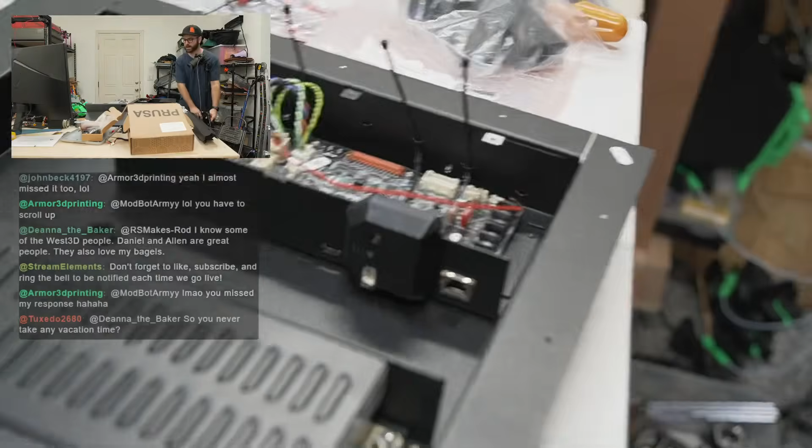You guys are too kind, I do appreciate it though. Believe me, it's not all that. Like I had to hide a user from the channel right before the stream. I had someone that commented something rude, and I tried to give them the benefit of the doubt, and I responded in a way that I thought cleared things up. But they just came back at me with an even more rude comment. I'm like, all right, goodbye.

I've developed a pretty big zero tolerance for rude people. If you're commenting something that's constructive criticism, I'm all for it, I actually encourage it. If there's things you see that I did incorrectly or ways I can improve, sweet. But if you're name calling and belittling, then sorry man, the internet's a big place. You can find another section of the internet to crawl to.

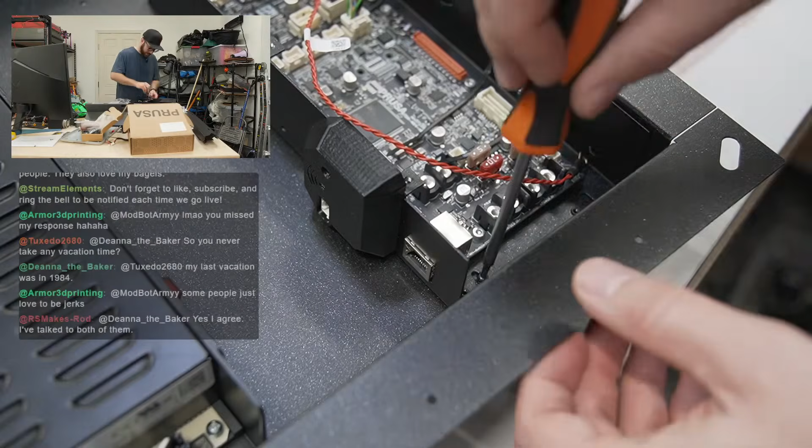I just don't have time for it. Yeah, some people are definitely miserable people, man. I don't get it, I assume it's, I don't know man. I was raised to be nice to people, do unto others as you would want done unto you. It's literally the golden rule. So yeah, I would never ever put someone down or belittle someone for no reason especially. I mean, if I'm gonna be rude to someone, they probably were extremely rude first. But yeah, I don't get it, dude.

But that's all right, yeah, just be kind. I agree. Golden rule is the best. Yeah, I couldn't agree more. My response to his Mount Rushmore comment was that you're my Lady Liberty. Oh my god, you guys are ridiculous. Oh my gosh, well, I appreciate all the laughs.

Okay, what is next? We've got this. Let's see, I do know where this part is because I just saw it a second ago. So we need a PSU cover cable, I've got that right here. M3 by 10, I don't think we've used those. M3 by 8, M3 by 12, nope. Okay, so we need M3NS, so M3 square nuts, and M3 by 10 RT.

M3. Nope, not in there. M3, yep, M3NS nuts, and then what was the other one? M3 by, did I say by 10 RT? Okay, that's not in here, but I've got the square nuts at least coming up. Let's see, M3, nope. M3 by 10s, spare parts, M3 by 30s. Wait, I'm confused, where in the world are my square nuts? M3NS nut, M3NS nut? Yeah, it should be in here.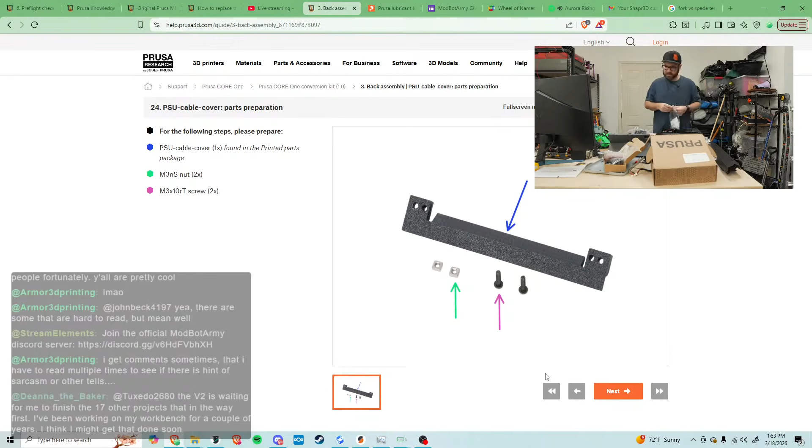I found it. I get comments sometimes that I have to read multiple times to see if there is a hint of sarcasm or other. Yeah, what a coincidence. I just got confirmation that the parts are printed on the...

Oh, they're sold, basically it paid for itself. Wait, the parts are... oh cool. Got it, so you're saying you used the printer to print out some pieces that you sold. I was trying to... very confused there for a second. I thought you were saying you printed out the parts to build the printer and sold those, but that's not what you were saying.

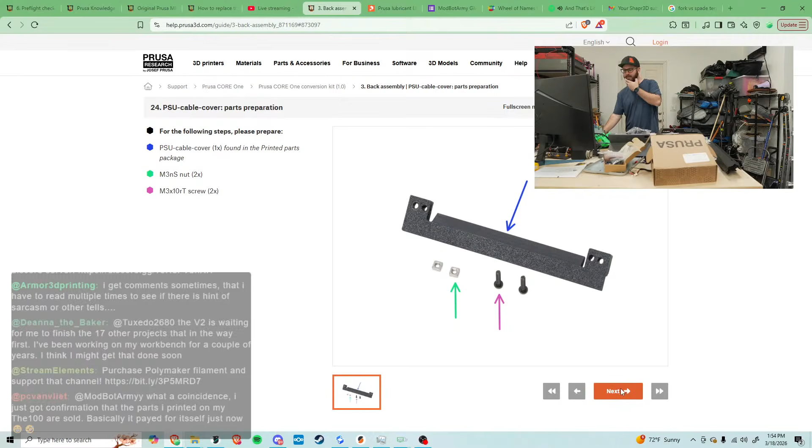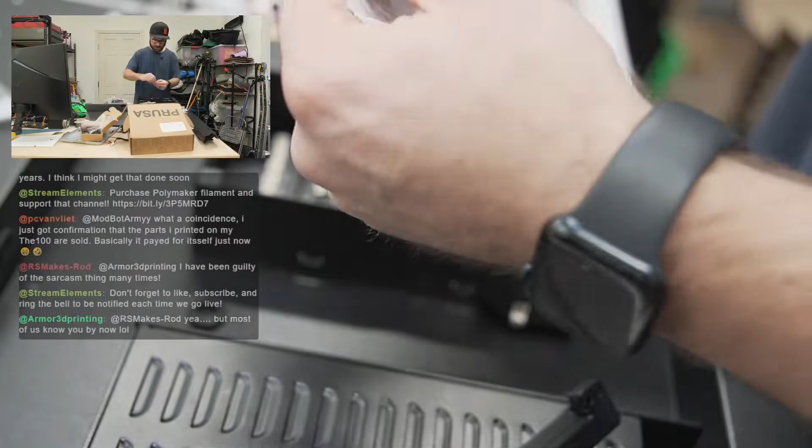Okay, so this printed part looks like it's going to have nut pockets in it, and it sure does. So we've got a nut pocket right there, one on the opposing side. So we are going to take out 2 of these nuts like that.

Try not to mix these up. Okay, see how easily or how difficult it is to get these to slide in. You know what, this is actually what you should be using needle nose pliers for. Yeah. Perfect. That would have been a lot more difficult with my fingers.

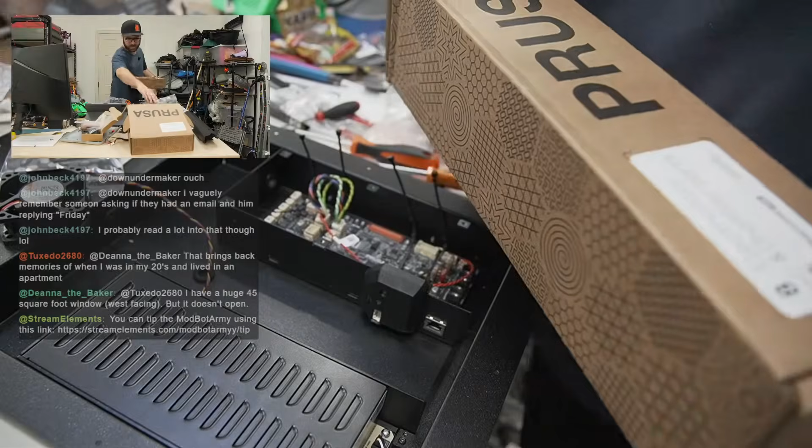Zip ties we've got. The thermistor doesn't appear to be in this box. There's a linear rail, there's a cable cover. Yeah, there's no chamber thermistor found in the electronics and chamber parts package. Oh, it's in, I got it. We took out the electronic box earlier that was inside there, so it's probably this guy right here. Awesome.

All is well. Okay, let me move this out of the way.

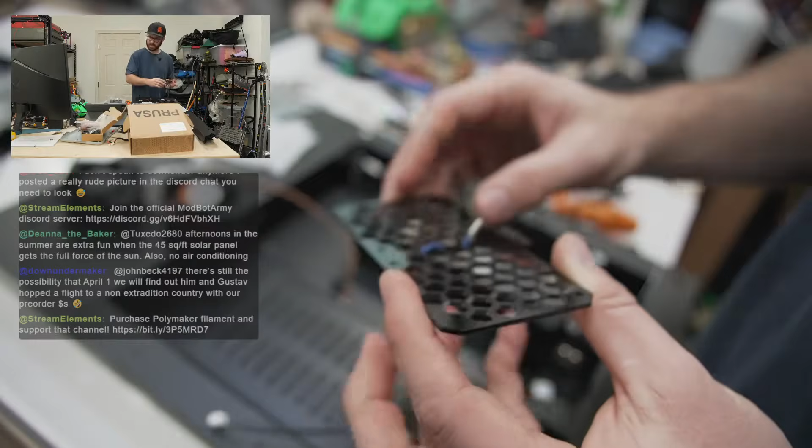Mine seems like it's at a little bit more of an aggressive angle than their picture shows, but I don't think... oh, there we go. I was able to push it down a little bit. There we go. So you just kind of weave it back and forth through the cutouts.

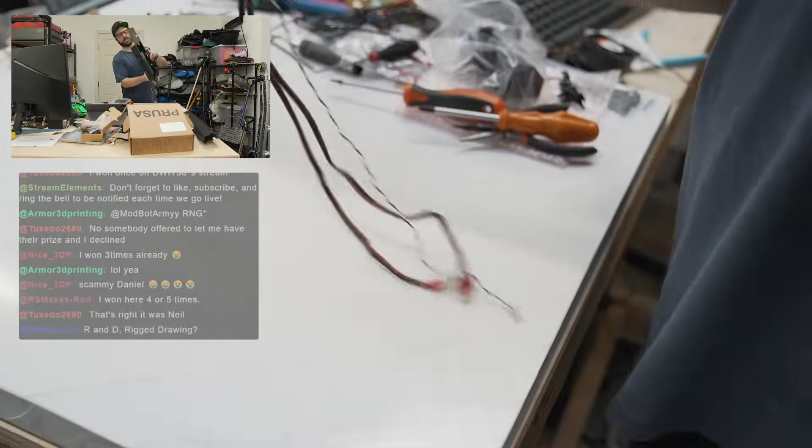Okay, so place the oriented back panel according to the pictures. So we are going to be flipping this guy onto its back. Oh God, I almost dropped the acrylic piece - if that little acrylic piece hits the concrete it could absolutely break it, so let's not do that. We're going to try to match the orientation, which is like this.

Okay, and then what next? Orient the fans with the cables running from the corners to the center. The side of the fan without the sticker must be facing up. Yep, got it, okay, so we're just matching photos here. I can follow pictures, pretty good at that. So this one's going like that, and this one is going like that.

Scary. Yeah, thanks, nice, I won here 4 or 5 times. Yeah, there's R&D - Rigged Drawing. Oh my gosh.

Yeah, it definitely blows my mind because I've had a few times where the same person has won in a really short span, like weeks apart. I think the most I've had was one person who won 3 times in a couple months. I'm like, what the heck?

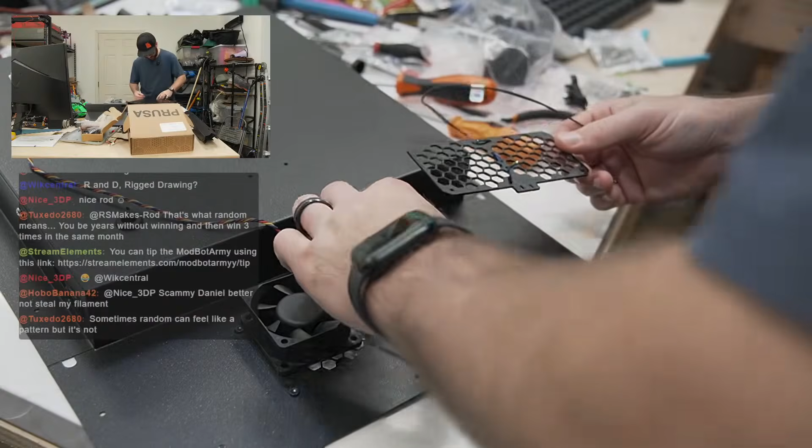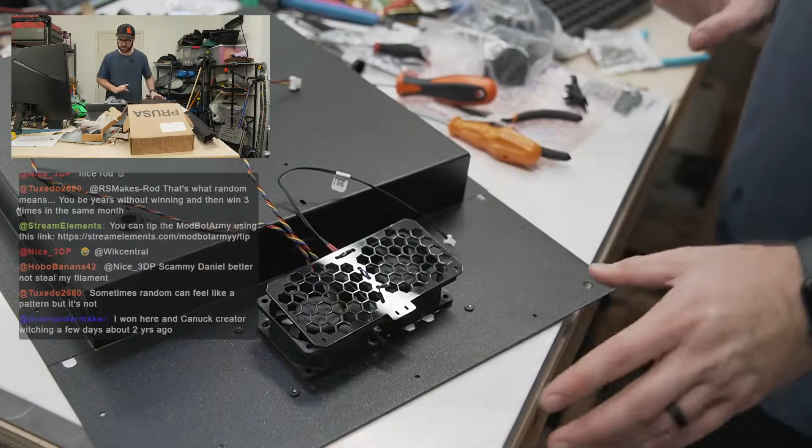Okay, I'm not really worried about aligning things until I've got the screw going in, so let's just kind of place things right there. So we've got screws going in the corners, and these are M330s.

Yeah, it's definitely, talking about RNG and random, it's like the thing with gambling where someone might think, if I just keep playing my time has to come, but that's not really the way the numbers work. Your time might come, but it could just as well, and more likely than not, not come. So yeah, it's good old random.

Okay so let's - I don't understand, there's no screw hole here. I messed up. It all makes sense now - Prusa didn't change their part, I installed the thermistor backwards. There's holes on both sides that I didn't realize were there. You've got these little slotted holes close together for the zip ties, and these other holes for the screws, and I did the wrong thing. So let me correct that - I need to take this thermistor back out carefully.

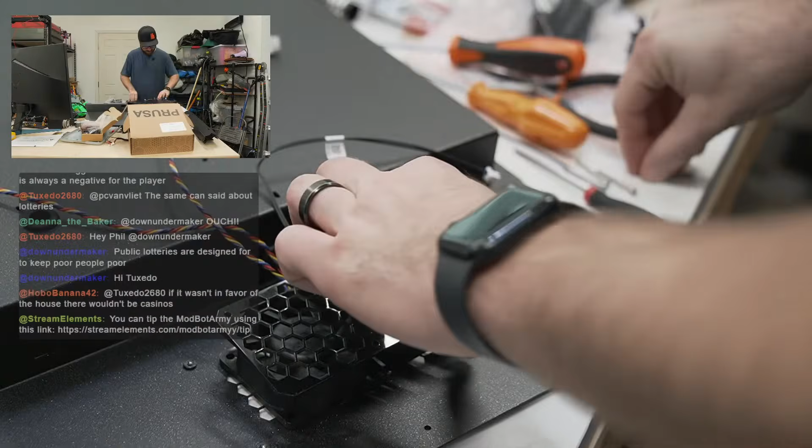There we go, okay, so now things look correct. We need to flip this around, and it's going to go in like this. There we go. Now all the universe makes sense. I was very confused there for a second as to why things weren't aligned up.

Ooh, my stomach is growling. I'm getting very hungry.

Okay, I'm just kind of loosely tightening them in right now. All right, let's not go too tight.

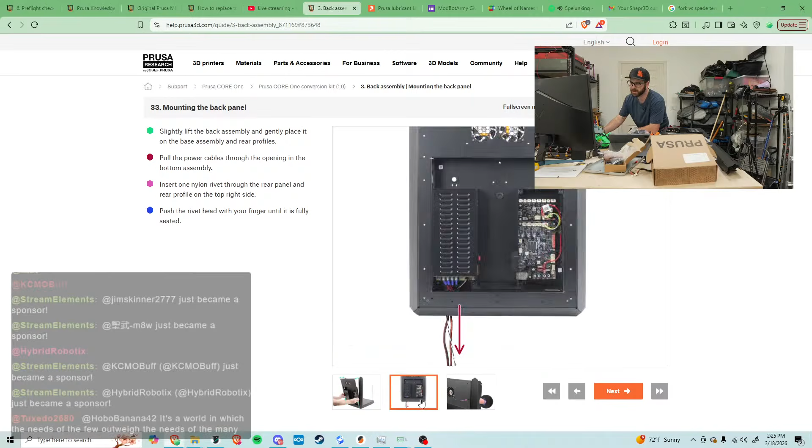So yeah, we're going vertical next, we're doing the back panels, or the back like side pieces, and then connecting the back panel to it, which is awesome, we'll start getting some height. And then a ton of, okay, these are the rivets going in there. Rivets, terminal stuff, okay, we're attaching the screws for the terminal.

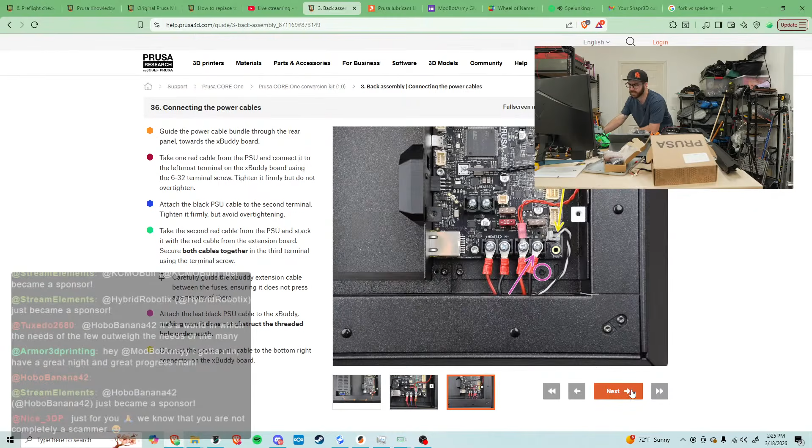Just doing a little bit of check-in on what we're doing, so finishing up some back panel stuff. What is this guy, some more cable? Okay, so we're gonna be running our stepper motor cables.

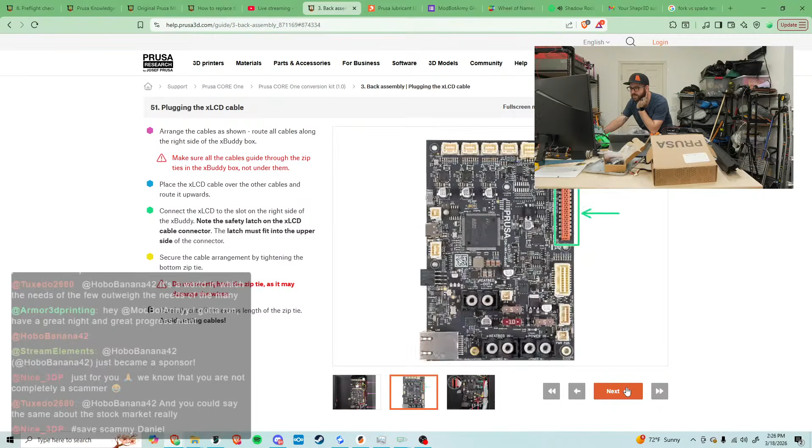So quite a bit of electronics next week, it looks like, routing of cables, pulling cables through the base, bunch of grounding. Wow, a lot of electrical stuff next week. I think that's primarily what we'll be doing next week, putting the back panel on and then securing it and going through all this electrical stuff.

We'll see, we'll try to speed run this. Yeah, we'll try to speed run that as much as possible.

Well, thank you so much everybody for hanging out today and listening to me talk about nightmares and fish tanks. That sounds like a metal band. Nightmares and Fish Tanks. I would listen to a band called Nightmares and Fish Tanks.